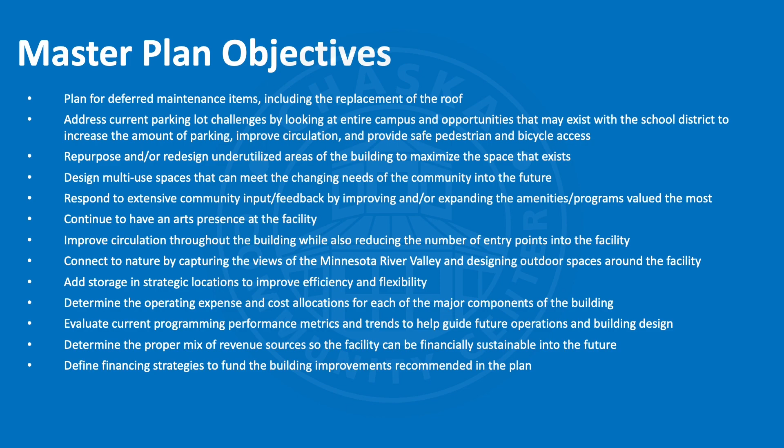The other one that stood out for me is this idea of connecting to nature by capturing the views of the Minnesota River Valley and designing outdoor spaces around the facility. Given this building's location with the overview of the river bluff, how can we take more advantage of the backside of the building and the great views back there.

So the factors that went into shaping the plan, like I said, community feedback was first and foremost. When we started out, we had an original open house where we invited the community in and got a lot of great feedback from that event.

We had a variety of surveys that went out to the community. We met with a lot of focus groups - we sat down and talked with the AOAs from our lodge, the Youth Hockey Association, and the church group that rents here every week. We also met with the city managers from the neighboring communities here in Chaska. We really just tried to get a lot of input into this.

From there, working with the task force, we tried to come up with what were the big themes that stood out from that community feedback, so we could start developing priorities and how we were going to meet those objectives to create the plan.

We also relied a lot on staff feedback. Our staff who work here day in, day out are really the experts, and they understand what programs are performing well and which ones aren't, understanding the operational expenses and revenues, and some strategies for us to think about going forward.

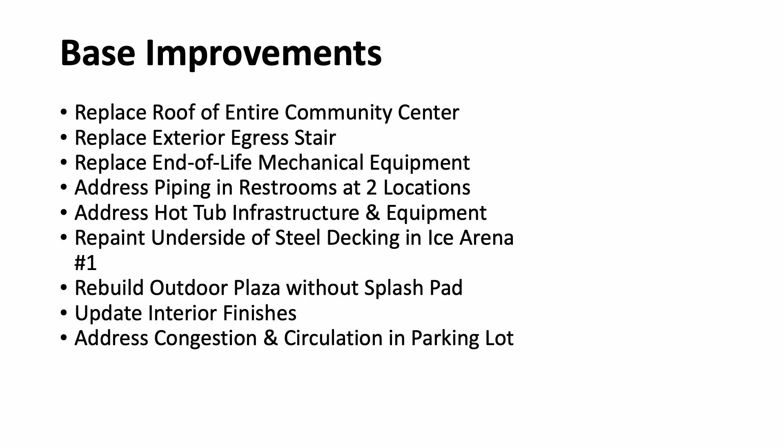This is day one. This is something that has to happen, because this is deferred maintenance that's taken 30 years to reach.

The second thing we heard a bunch about was the site. We wanted to talk a lot about the building, but a lot of the comments from community feedback focused on the site: lack of parking, unsafe drop-off, confusing circulation patterns. So we looked at the basic location of the site and tried to understand how we can improve on this.

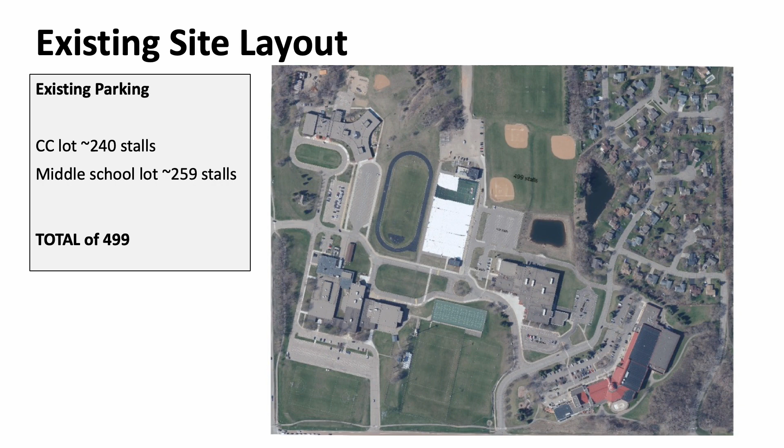It's got about 499 spaces between the community center and the neighboring school. Based on these improvements, we see a need or demand not only current day to increase parking, but also to expand that based on these new uses.

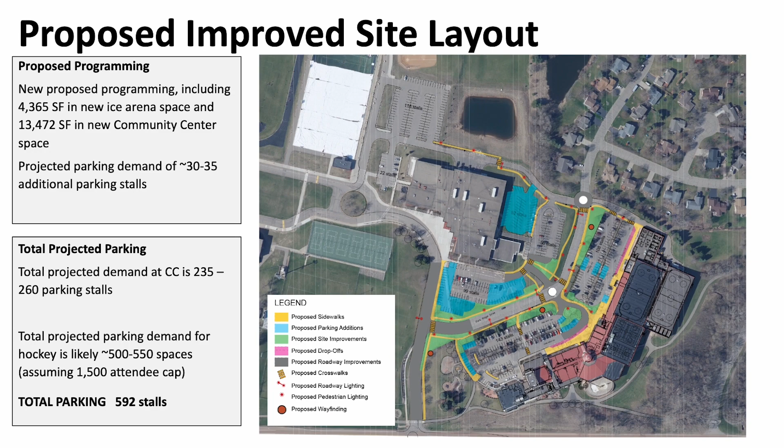So we looked at a plan that starts to improve the circulation, clarify it, and minimize some of the cutouts within the parking, meaning fewer decision points, because decision points in parking planning mean unsafe conditions—people are looking instead of paying attention.

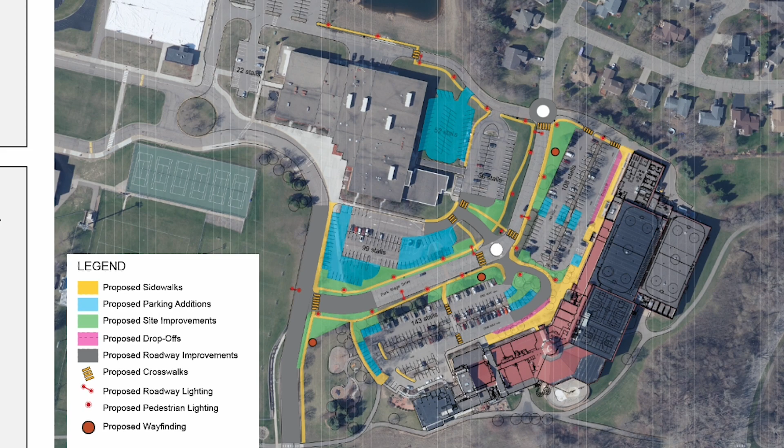The second thing we did was improve the drop-off to a single central entry. Everything in blue represents added parking, everything in green or pale yellow represents improved circulation. And you'll see this in a minute when I talk about the hockey, but we've also talked about adding an entry for the new hockey at the far north end of the building.

So what you'll see is a site that's vastly improved, has nearly 100 additional parking spaces within the vicinity, is safer, and is more well laid out from a wayfinding standpoint.

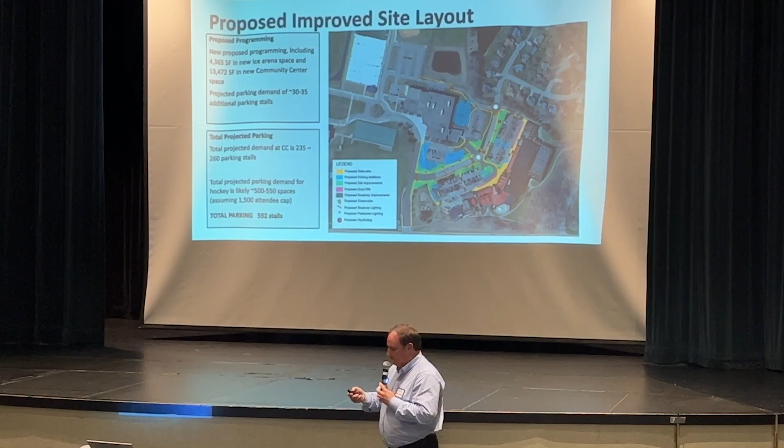So now we get to the architecture. This is the fun part. First and foremost, we wanted to look at the spaces we think we need to improve, and then look at the spaces we want to expand.

Down this list, you can see the things we want to improve: the lockers, the lobby, pool, ice rinks, theater, meeting rooms, the lodge. Things we want to expand—the things that really need to grow to serve new programs: gymnasium, fitness, the indoor playground, multi-purpose spaces, and finally some of those art, innovation, and creative spaces that Marshall mentioned.

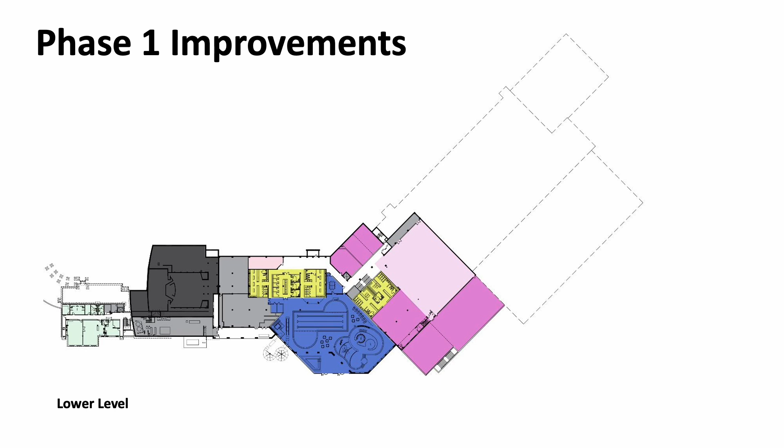So the thing I'll note about this big color plan: if it's in color, we're changing it, we're touching it. You can see, just based on the vastness of this plan, there's a lot that goes into these improvements we're presenting. That's the main level, and on the lower level you can see this study really impacts almost every area of this building.

So the first thing we wanted to look at was the lobby. We have some challenges with the lobby. If you want a safe facility, a safe community facility, you should have interaction with the staff member when you come in the front door. And right now, we kind of sneak past the desk.

Let's all be honest, we all kind of just walk past and go in and do what we want to do. We need to change that layout so that staff will interact with everyone that comes through this door in a more purposeful way. We have a control point that will allow them to actually interface as you go into what we call the pay-to-play zone, or as people interact and come down the other corridor to the more community services zone. We're talking about moving that stair because that really breaks that control.

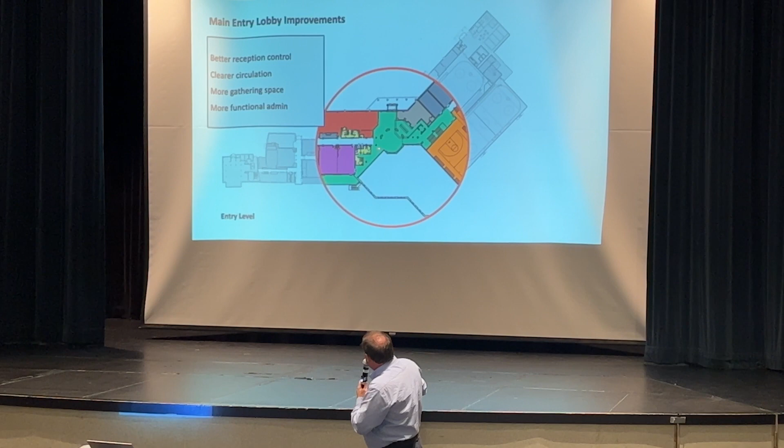People can kind of come in and sneak down without really interfacing. We're moving that stair behind control. So now if you want to experience the vastness of this building, you've passed by a point by which staff has interacted with you, if it's nothing more than saying hello.

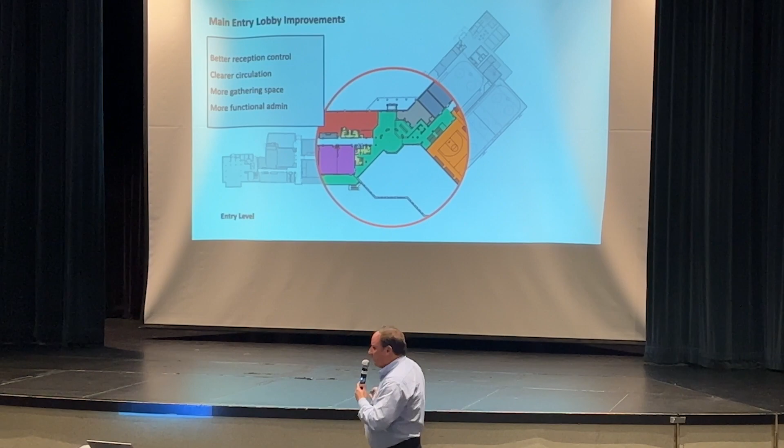It also improves the gathering areas too. Right now the gathering spaces are sort of scattered throughout that lobby, but by improving that, we've allowed a lot more opportunities for gathering in and around this lobby that aren't within the circulation patterns. And you can see a larger, more welcoming front desk experience, reception experience.

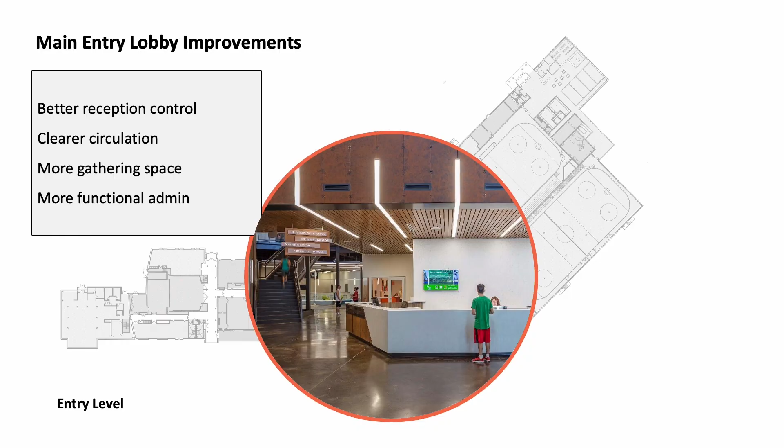The other thing we looked at improving was the locker rooms. I'm not even going to ask for a show of hands because I probably know the answer. No one's comfortable in locker rooms, let's be honest. But improving them is important to the function of a good community center. Having welcoming, warm, well-lit locker rooms that are clean and fresh.

So one of the things we talked about was a more efficient layout for the locker rooms, expanding the equitability and inclusivity so that we have a large family change or gender equitable change area. That sits right here in the middle of the locker rooms. And we've also added new fitness-oriented locker rooms.

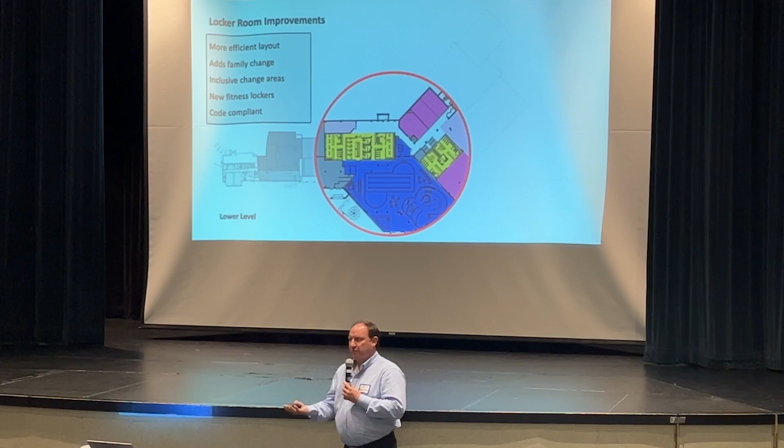So these are more club style. They're dry locker rooms, not the wet tiled rooms. These would be more focused on the fitness center and gymnasium uses. So now you have two choices of where you might want to change in this building. Again, bright, fresh, clean, modern.

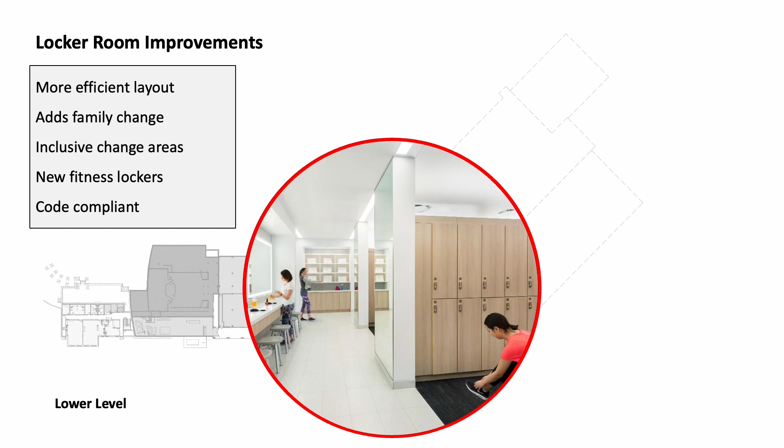Big move on this section of the building is improvements to the ICE lobby. One of the comments we heard was the ICE lobby is constricted, there's not a lot of queuing area, the locker rooms are tiny, the concessions are small, everything about that area was really congested. So we came up with the idea that that north wing of the building that's currently a tenant space would actually become the new entry to the ICE rink facility.

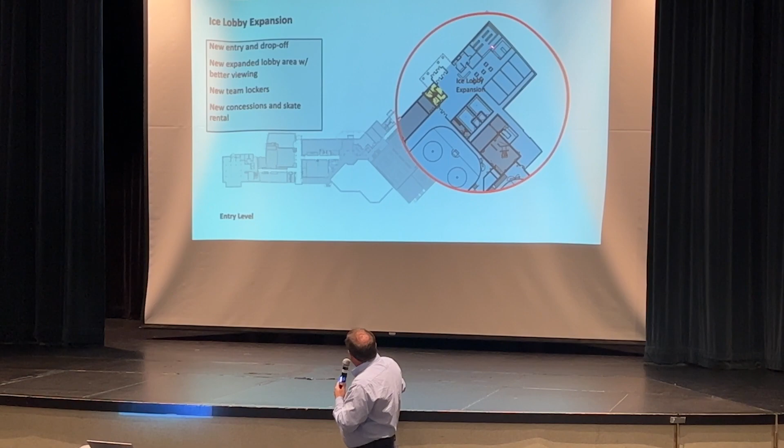So not only does that give us a new drop-off point that's not as congested as the one that's currently too close to the other main entry, it allows us to have a large entry lobby that's dedicated to ICE, large office space with a check-in, skate rental, concessions, large locker rooms, and good viewing of the ICE, as well as access to the second sheet without having to go through the entire facility to get there. So vast improvement to the services of the ICE rink and ICE programs.

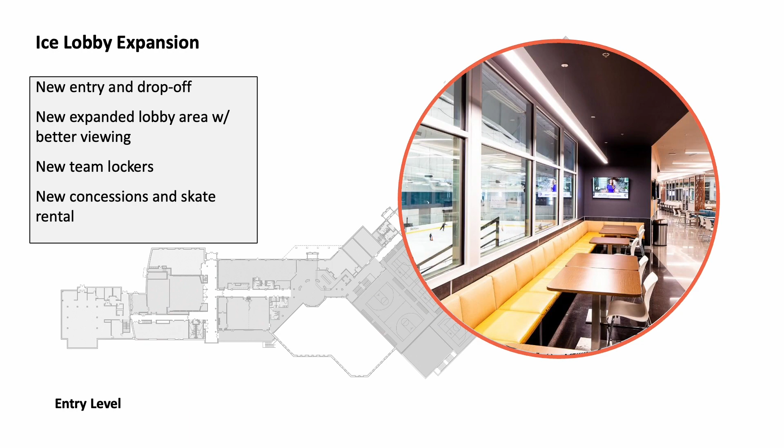Next was the pool, right? We looked at the pool. This is the space in a building that you'll spend the most money improving, the most money operating, and the most money maintaining. So we have to do this space right.

We didn't look at a huge expansion to the aquatics area because it's got plenty of opportunity for amenity. But we did look at cleaning up a lot of the things that we heard were problematic. One of those is the slide tower. It takes up a lot of space. It creates poor circulation, difficult lifeguarding. The second thing was that elevated hot tub.

And so we did a couple things. First, we added a small addition to the building that includes a large flat hot tub that sits and looks right out at the view, right along the glass. We moved the majority of the slide to the exterior so that you encapsulate the tower inside, but the actual flume of the slide goes outside and comes back in. Again, taking a lot of that heavy lift stuff and bringing it outside the building. So once we did that, it allowed us to rethink the way that this leisure pool works.

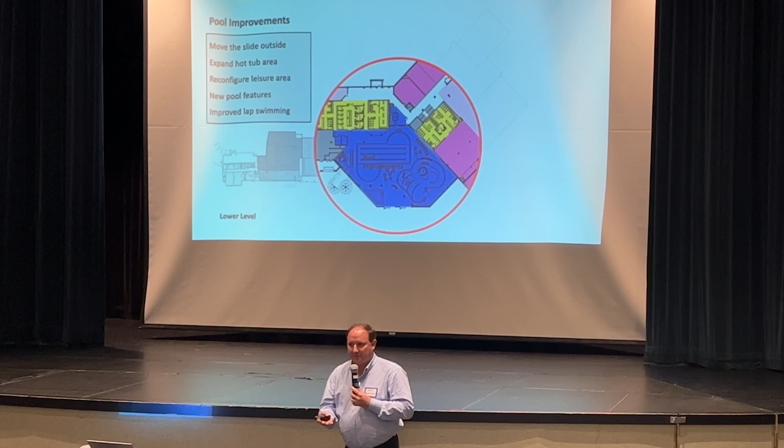Now you can see nothing is impacting that interior lap pool. It can now function like a lap pool, or if lap swimming isn't happening, it can function for lessons, aqua aerobics, and other activities when it's not acting as a slide pool. These are the big improvements to the aquatic area, which will include new features like a lazy river, play structures, and a vortex, as well as vastly improved open deck space and better access to the exterior.

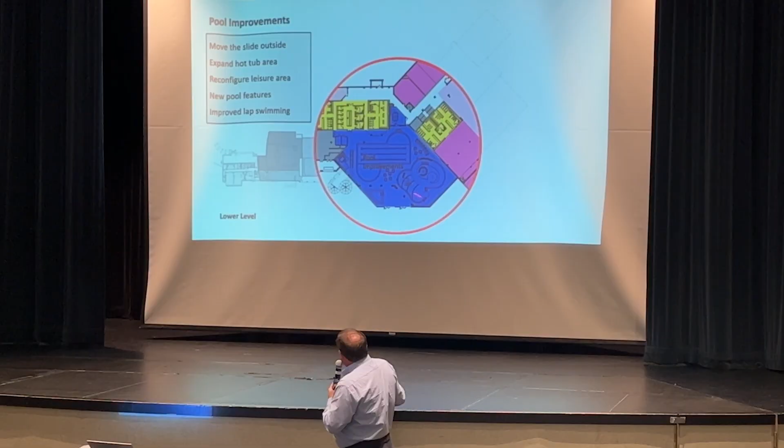This space, the theater, is a wonderful, beautiful space in this building. It's vastly underutilized. It's really appropriate for theater events, with a wonderful acoustic environment, great technology, and comfortable seating. But when it's not being used for theater events, it's generally closed down.

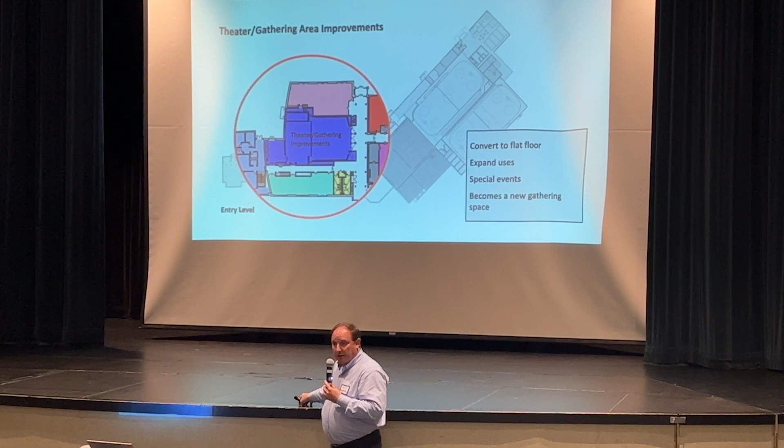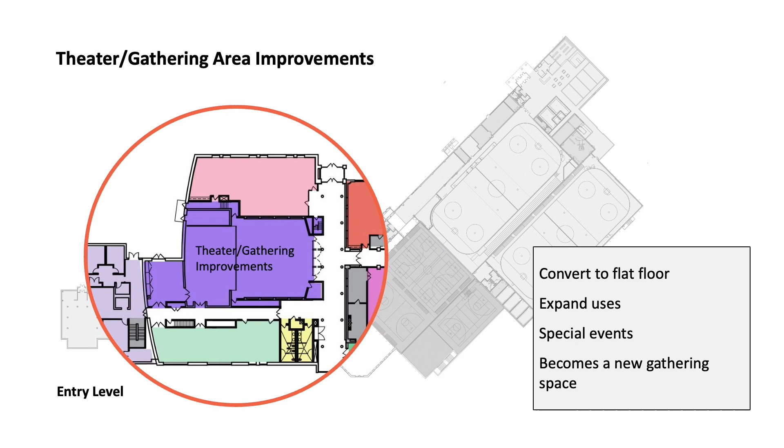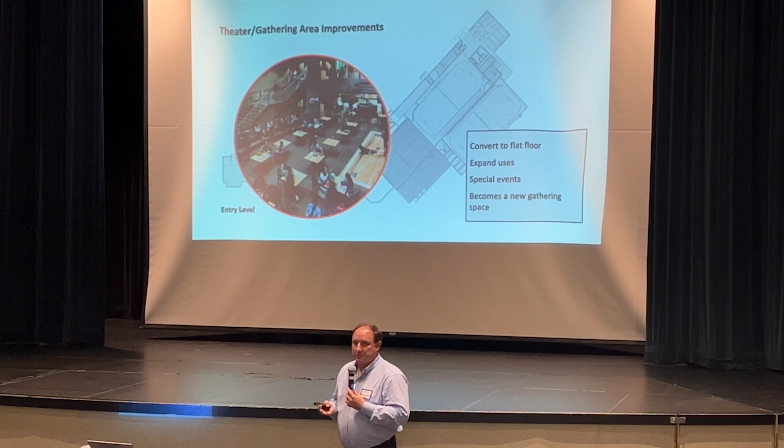So our proposal is to flatten the floor of this space, leave the stage, but remove the permanent seating. It can still function as a theater event with temporary seating, just like this, but it'll have more opportunity for special events, banquets, meetings, and during the day it can be set up more as a casual cafe. This is a space you can come and gather, kind of like a second lodge. So we think this space can open up a lot of opportunity and better utilization through having more flexibility.

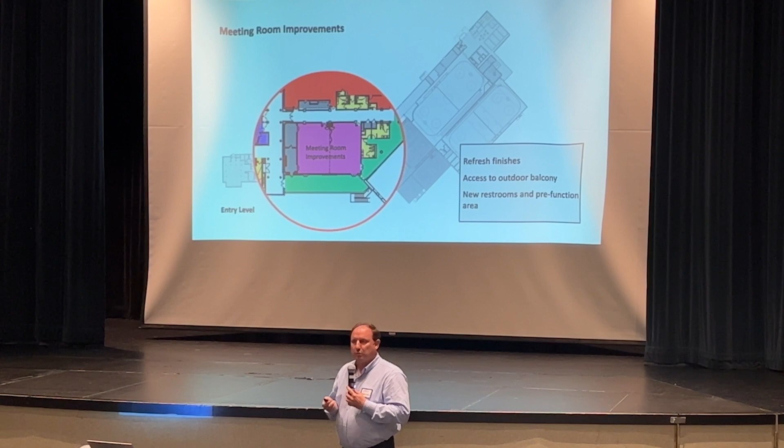Some of the meeting room improvements apply to both the meeting rooms we were just in, the red brick room, as well as the lodge. These improvements don't change the functionality; they're just upgrades to the finishes, bringing a facelift to those spaces. That's where we've invested some thought, making the meeting rooms and the lodge feel more current with a 30-year refresh.

And not to mention capturing those great views. Technology upgrades are also really important. In the 30 years this building's been operating, technology would go a long way to improve some of the programming within our meeting and gathering areas.

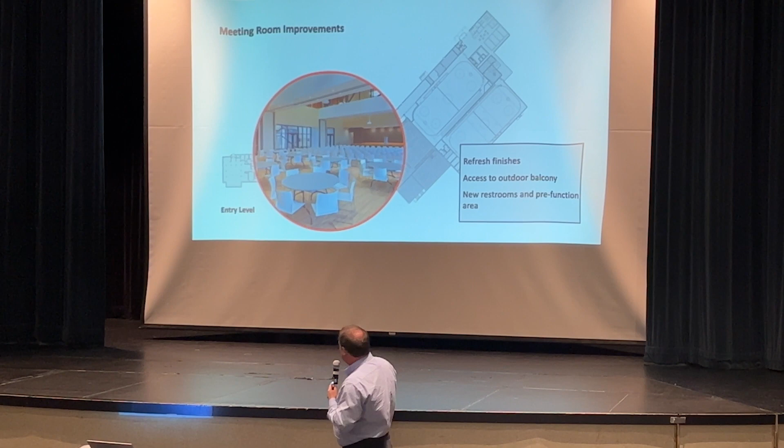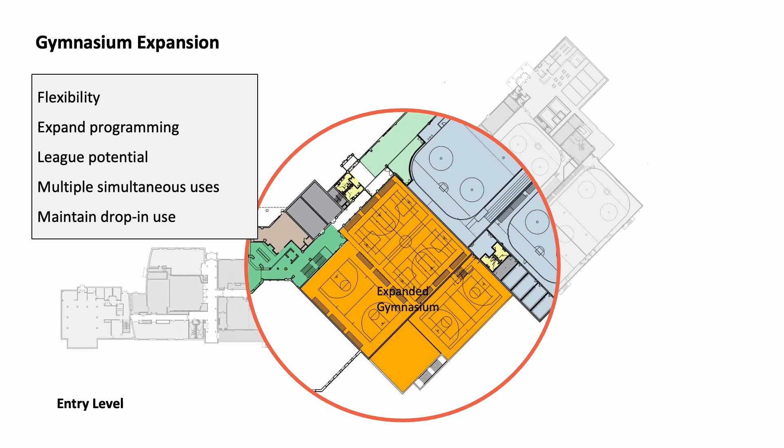We're also proposing adding a significant addition to the east of the gymnasium, expanding the gymnasium uses. This allows us to better accommodate things like pickleball, multi-sport activities, volleyball, badminton, and of course basketball. That increases the gymnasium by nearly 6,000 square feet and gives us a lot more access to better programming.

By doing that, we allow ourselves to have more space underneath where that gym currently sits. We've lifted that floor up to the main level, and now we have that space we can fill in. That allows us to have all this new fitness space as well as those new locker rooms to fill in under that area, and expand our equipment offerings. Now we don't have to use such a tight space to pack with equipment.

We can have proprietary fitness, we can have boot camps, a wellness focus. Like Danelle talked about, this is the kind of thing that really draws a broader usership to your fitness, health, and wellness programs. It's not just a weight room anymore—it now becomes a multifaceted health and wellness amenity.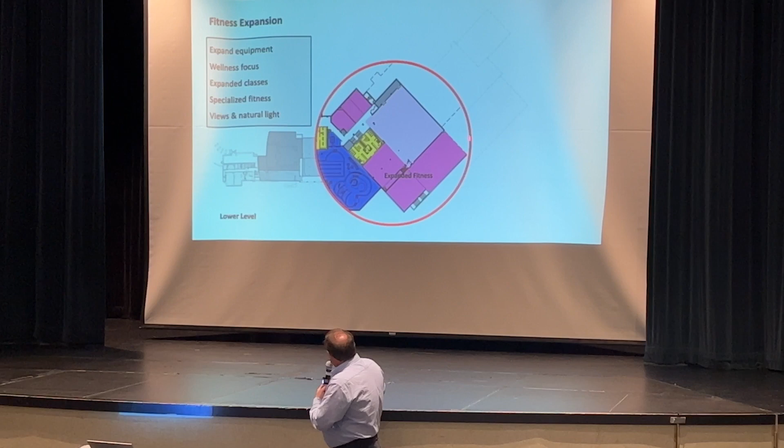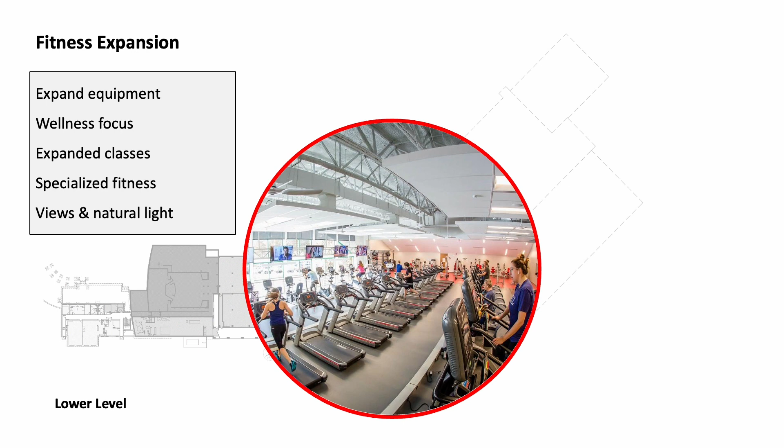The other thing we really thought is that it should take advantage of the views as well, so this whole facade would be transparent out to those views. I'll point out this is the other space we create once we lift that gym. I'm going to show an image—that's the bright open fitness space, bright open group exercise spaces.

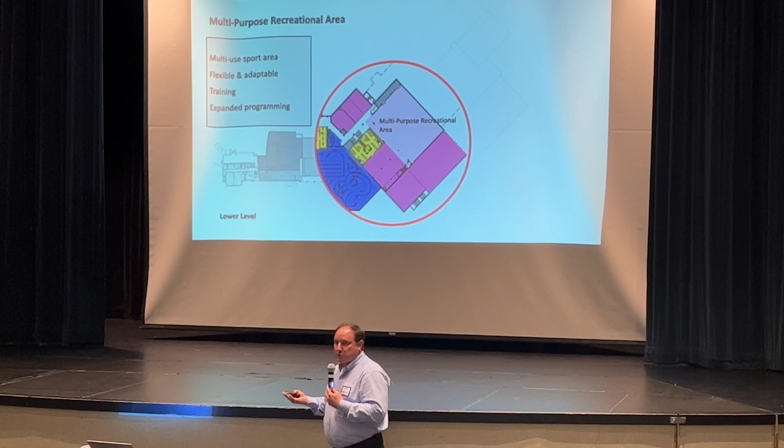But now we also create this, what we're calling a multi-purpose recreational space. Think of this as kind of a field house type of space—resilient rubberized flooring, multi-sport uses. This might be where you would have dodgeball or laser tag or anything else you can think of that isn't a traditional court space. It could also be used for sports training and practice. The whole purpose is creating a secondary multi-purpose recreational space similar to a gym, but expanded to different uses.

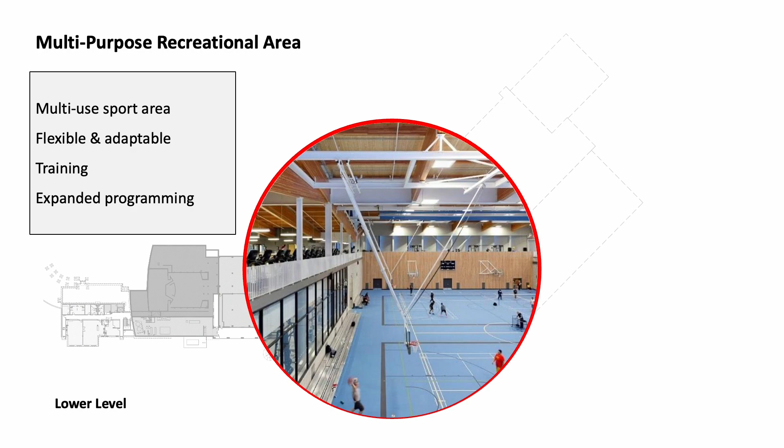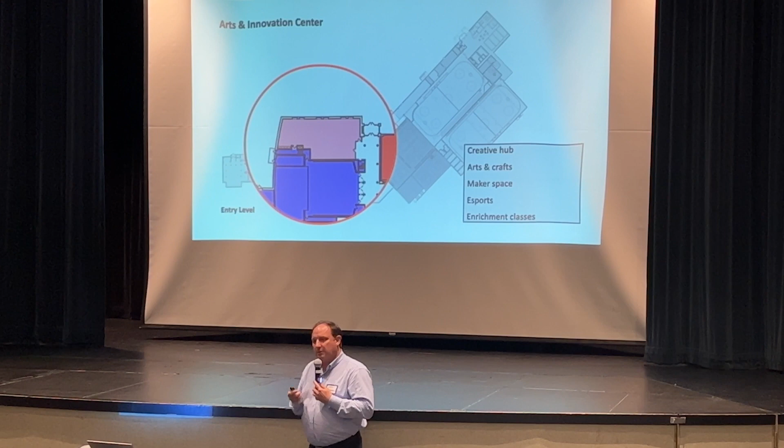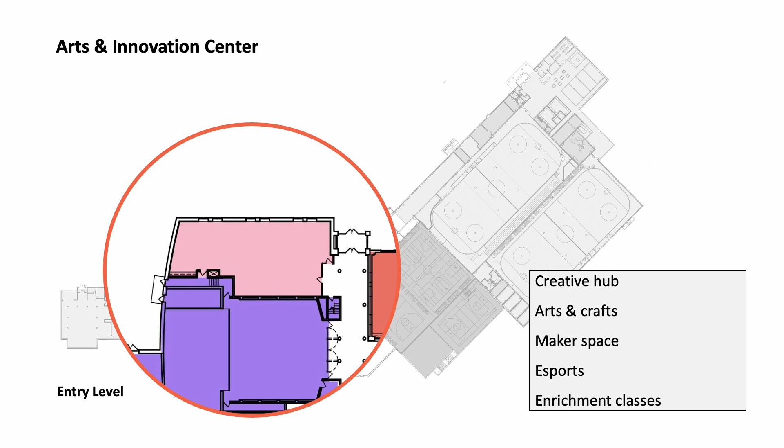The area currently occupied by the offices, if staff administrative offices move, this can now become an art, culture, creation, and innovation space. Think about things like robotics, maker space, esports—all the things youth and teens focusing on a STEM environment would be looking for in this building. A lot of school programs do this, but many fall short due to crowding and amenities, so we think this is a great program for youth all the way through multi-generational use, also focusing on arts and crafts.

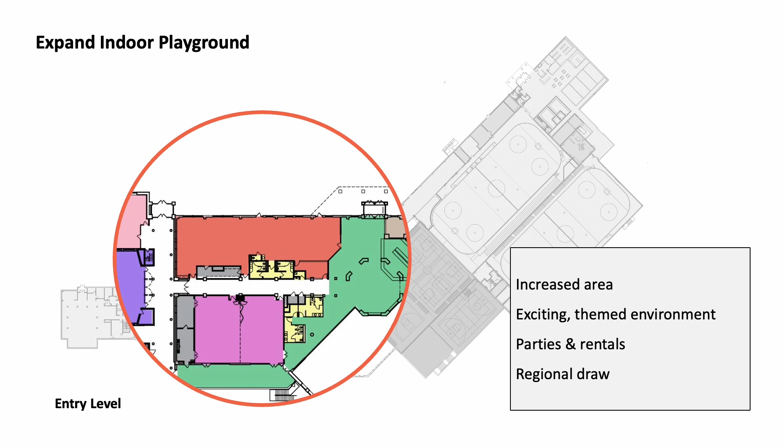We're also talking about expanding the indoor playground. This more than doubles the size, but it's not just becoming larger—the idea is that this becomes more of a regional destination. It's not just a small play place; this becomes a true themed, immersive indoor playground environment, accessible right from the main entry. This is a great place for parties and rentals.

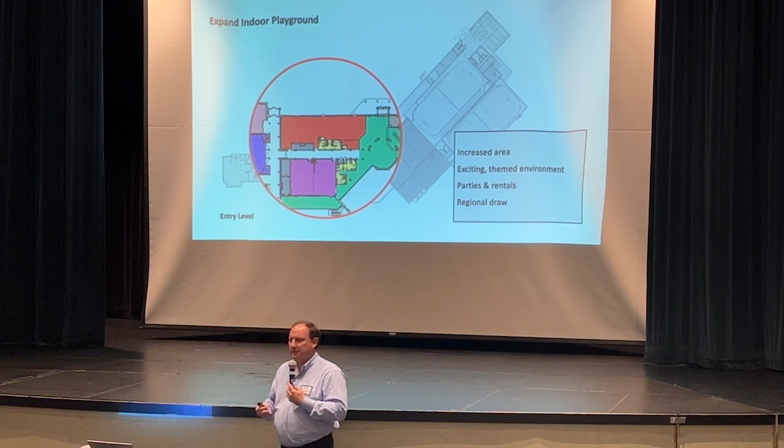We also located the sensory room in this area because we feel like this space, with all that youth activity and intensity, might be a good place to have a calming environment for users who may need that. You can see an image of what that might look like.

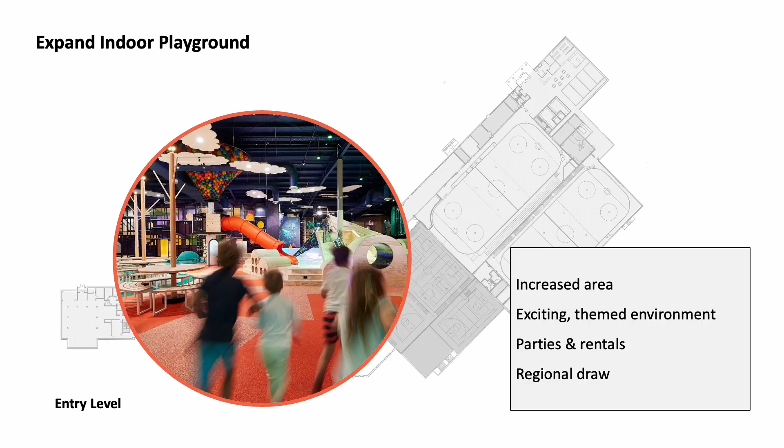So that sort of summarizes the plan in its purpose, the program, the expansion, and how we re-envision the spaces. Now I'm going to introduce Matt Podhradsky, your city administrator, to explain the costs.

All right, thank you everybody for coming tonight. Really appreciate it—especially our task force members who have been involved in this for the last year and a half. It's great to hear stories like Danelle shared tonight.

It's great to talk about some of the things we want to change and expand in the community center to make it more accessible to more people in the community. We heard a very similar message from one of our members this morning. Her name's Ellie, and she talked about coming from Cedar Rapids, Iowa, a city significantly larger than Chaska that didn't have a facility like this. She shared how special it was to move, after living there for 38 years, into a community like Chaska that's about a quarter of the size, and think, what kind of amenity do we have here to utilize as residents? Our task force members, from bottom to top, all have these types of stories about why this facility is important to them and why it's so important for us to invest in this.

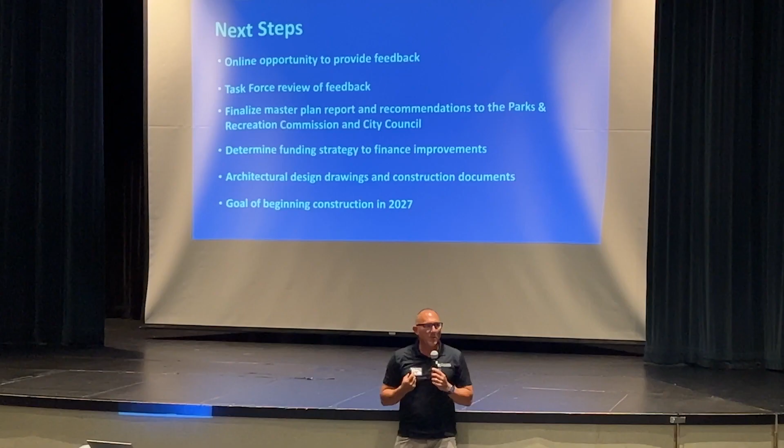As Matt said, in the background there will be continuation of determining the funding strategy to make this project a reality. We'll also need to embark on the architectural design drawings and construction drawings, creating those documents, which itself can be a 12 to 18 month process, all with the goal of trying to get this project started in the year 2027. So hope you enjoyed the presentation.